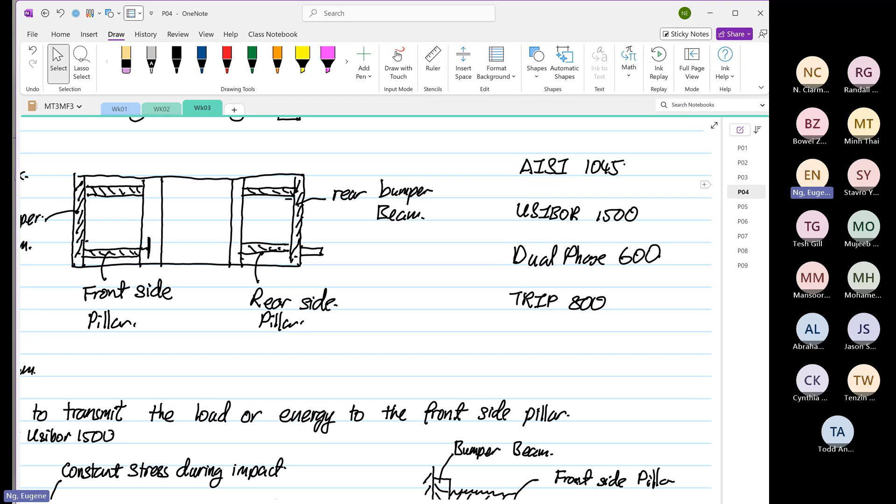Pillar, do you want it to collapse? You want it to collapse, something will die, man. You will die. So you want it to collapse, but you don't want it to collapse so much. Yes or no? Right? You want it to collapse, and you don't want it to collapse so much. It's like, do you want or do you don't want? Right? So what material will you use?

Not saying what he's saying is not true. But if you look over here, how many of you reverse your car more than 30 kilometers per hour without stealing something? I will only go more than 30 kilometers per hour if I'm stealing a car. You see the video in Mississauga, what happened? The lady ran over the guy, and the guy did not die, lucky for him. Yes or no? I will only reverse more than 30 kilometers per hour if I'm stealing something, or my job is a getaway car.

Have you reversed more than 30 kilometers per hour? Why not you try later on, okay? When you reverse, I think your gears will go. I think most cars are rated up to 40 kilometers per hour. Okay? You can go beyond 30, but you know.

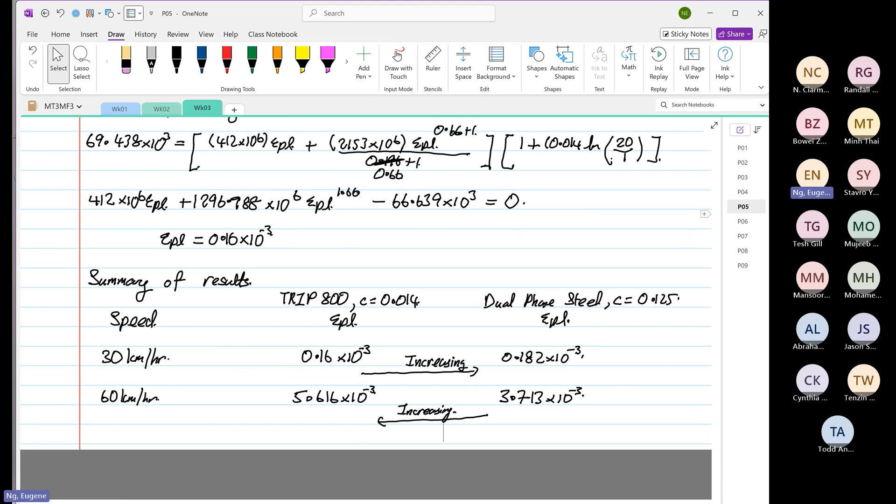Okay, good luck. But you can see the energy, the strain induced during deformation, we have this data down here, right? At 30 kilometers per hour, upon impact, the strain induced is not so different. In fact, you are better off with what? So why is that? So if we were to assume that upon impact, this is not a great example, but it's just a sketch, okay? Upon impact, this is the stress.

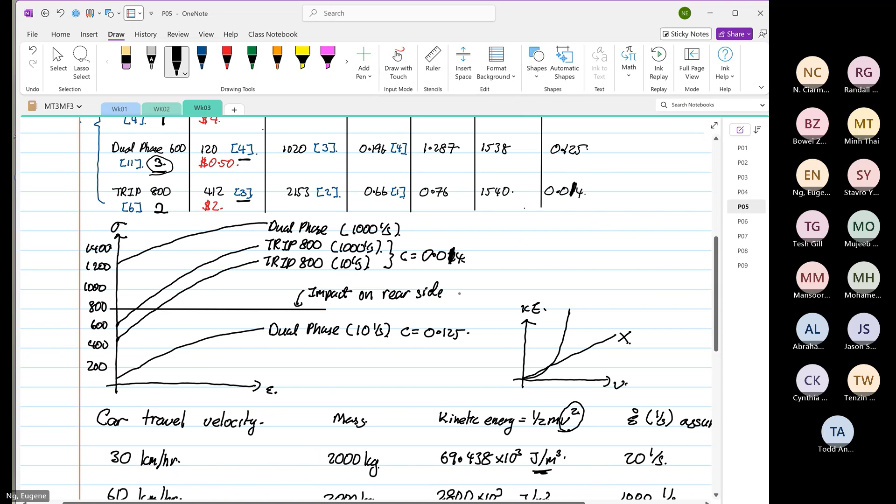And as I said, this is not a really good example. You can see the strain induced on dual phase steel. Let's say I project this. You can see the strain for TRIP steel is lower than dual phase. Yes or no? Right? So you want it to absorb some energy. You want it to collapse, but you don't want it to collapse way too much. Are we clear?

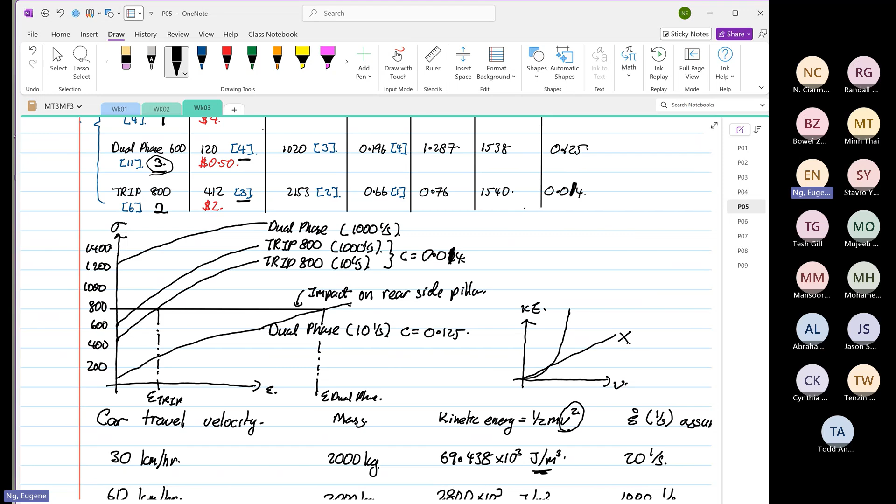Okay, so for the rear side, we call this the rear side pillar. The function is to absorb the energy during impact, and must protect the gas tank, and also the rear passenger. Right? You also want to protect the rear passenger. So the preferred material is going to be what?

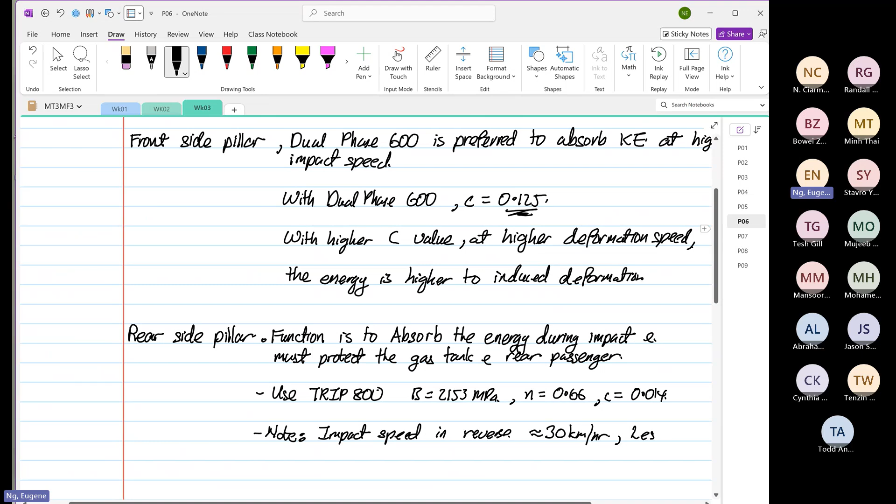TRIP 800. Why? Because B is equal to 2153 megapascal, N is equal to 0.66, and C is equal to 0.014. So note an important thing to consider: the impact speed in reverse is about 30 kilometers per hour. So 30 kilometers per hour means less kinetic energy to absorb. Okay.

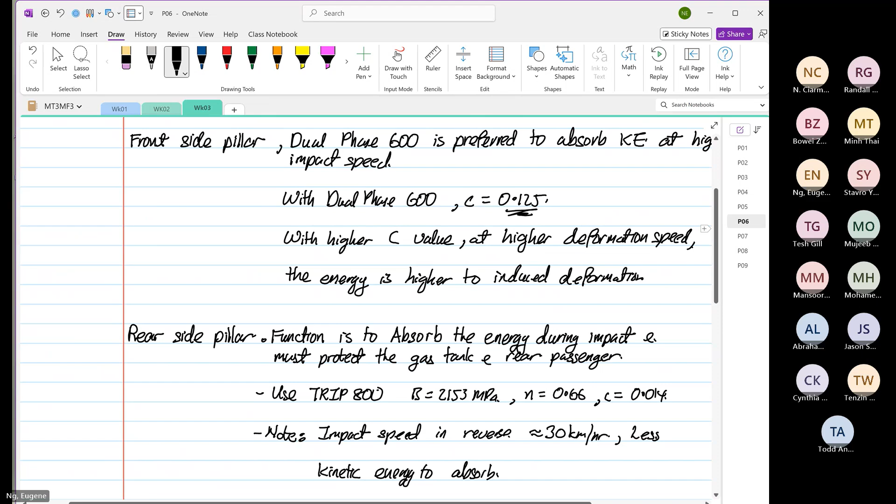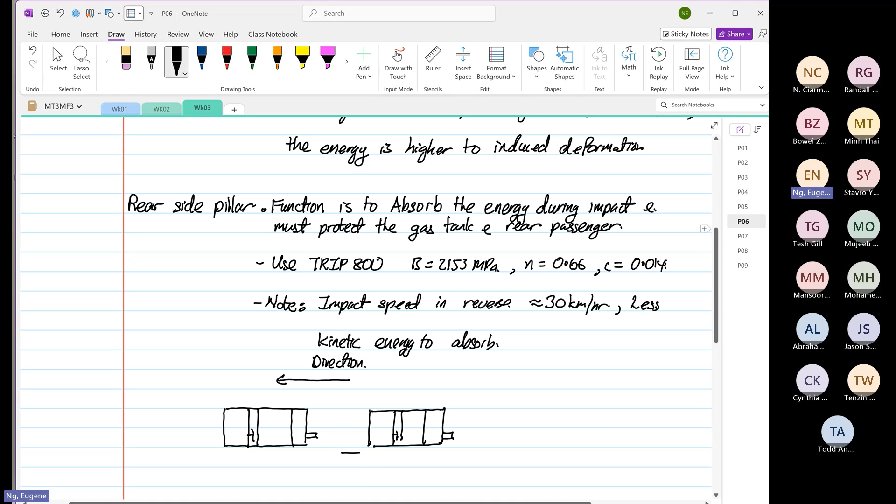So if this is the direction of driving, this is a car, this is the steering wheel, this is the exhaust, and then another car, with the steering wheel and the exhaust. So this is the direction. Now, if this thing were to hit at 100 kilometers per hour, it's an old car, it does not have bells and whistles, it goes at 120 kilometers per hour, what will happen?

Will car A explode because of car B? Yes, why, no, why? I'll tell you, it will not explode. Car A will not explode. Why? Remember, the rear is not designed for impact. Only designed for like 30, 40 kilometers per hour. But this car is coming in at 120. And then it rear ends you. What will happen?

This happens on the 401 every day. But did the car explode? Sometimes it might. I know some people drive at 240 kilometers per hour. The car can bend. Why? Because at the front end, you have what? At the rear end, you have what? So that is why when someone rear ends you, most of the time, the car behind has more damage on the front than the what?

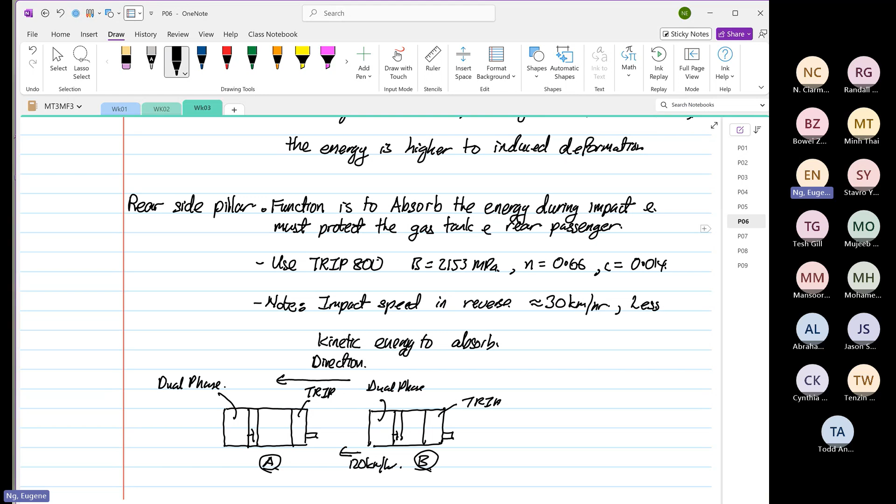Now, they start designing cars like this. Who made them? You and me. What is the problem with dual phase steel during manufacturing? C is equal to 0.125. If today you are supplying for Toyota, they want you to make 600 today. Tomorrow they say, my car orders are so good, next month I need 1,200 parts. You outsource, you start to buy new equipment, you cannot increase your manufacturing speed a lot.

I know this course is called manufacturing engineering, but as a manufacturing engineer, you have to see the side of a mechanical engineer and also understand the side of the manufacturing engineer, and also the aspect of material science. Yes or no? If not, you put 3 groups of people together to make a car, they will kill one another. Agree or disagree?